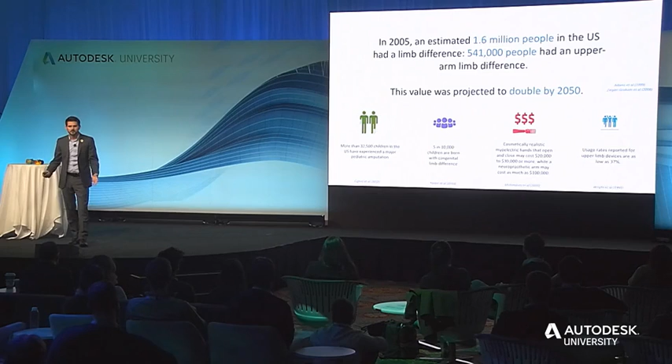Can you think back to the first time you saw a sonogram, or a friend or a loved one saw one? There's a lot of emotion that goes into that moment, right? There's joy, there's some nervousness, there's all that excitement and anticipation for what's going to come next.

But for about 5,000 families a year, what they see on the sonogram looks a little different. Amniotic band syndrome is one of the leading causes of congenital limb differences. For these children, there's a tendril in the womb that will wrap around a growing limb bud and cause a limb, an arm or a leg, to not fully grow.

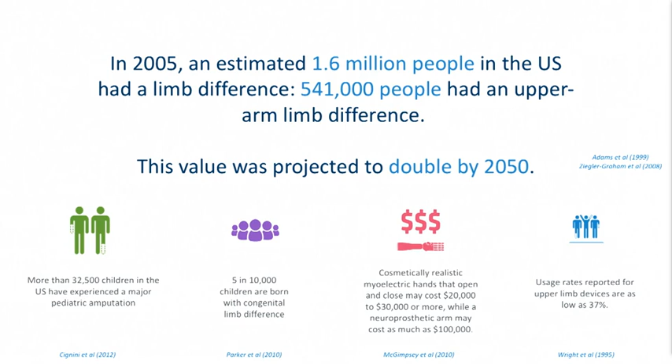When you see that on the sonogram for the first time, it may come as a shock. It's not genetic, it's no one's fault. There's nothing you can really do to prevent it. It just happens. But these children go on to be incredible. They can do everything. But there are certain challenges, and those are engineering challenges we would like to help fix.

The reality for these families is that access to prosthetics for children are quite complicated. The cost of a prosthetic that has full finger dexterity and looks like a human form could be well over $50,000. And children are always growing, and you can imagine having to change out their complex bionic arm as often as you change out their shoes. It would really get expensive, and the insurance companies feel the same way.

What we also find out is that because prosthetics are normally driven for the adult market, they're too heavy, they look like doll plastic, which often makes people feel like they're apologizing to the world for being broken. We saw all these opportunities as a chance to be able to use engineering and creative art to completely change the story for what prosthetics look like.

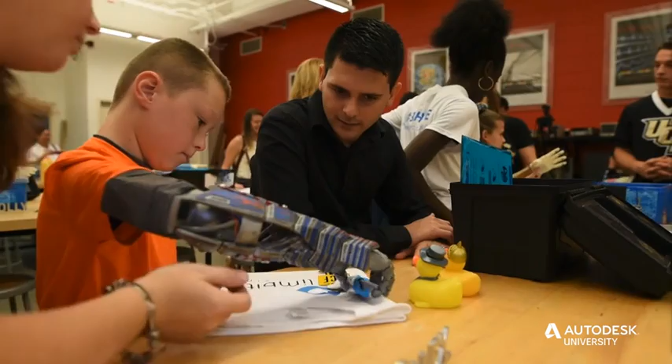This was all inspired by a rubber duck. We wanted to be able to give kids back the opportunity to grasp such an organic, whimsical form. It's so simple, but it's complex in the fact of the mechanics that go to pick it up.

This was one of our very first prosthetics for Alex, and you can see him learning how to use it using an electromyographic actuated system.

We did not have that $50,000 in our budget at my kitchen table. We had our coffee money, which is about $300 at the time, pooled between all of us working on the project. So we came together and we developed this prototype for Alex to be able to fully integrate and use in his daily life. And now at his school on Superhero Day, he dresses up as himself.

But we were at the very beginning, so this was only open and close manual grasp by flexing his bicep muscle on the limb that has a limb reduction.

We really wanted to be better. We wanted to be able to play the piano and to be more expressive and to inspire him to go on, to be able to help others with technology.

We really had to change everything about how we do traditional design. And in order to do that, we found that Fusion and Eagle and Maya were really effective for this. We're creating really organic shapes that are really hard to make in traditional CAD softwares.

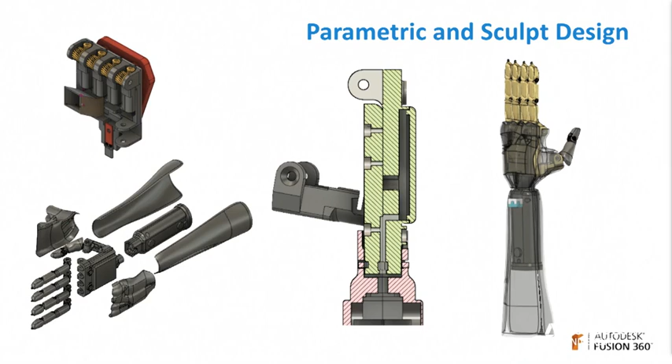But we still need that parametric design for forms that have to be rigid, structurally sound, and have to be able to integrate together with mechanical parts. On the PCB design, it was really complex.

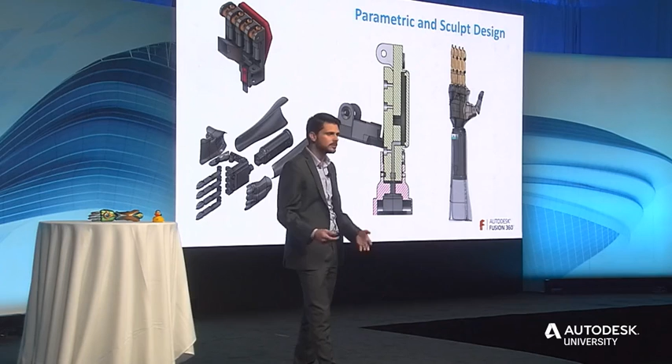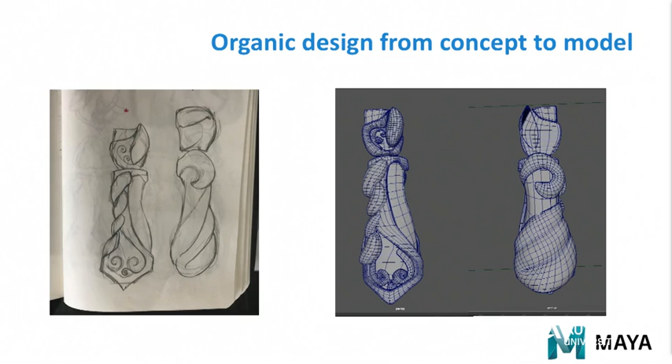The very first model was a bunch of batteries, a bunch of wires, and a breadboard kind of packed all in, much like everyone's first prototypes. And as we started to streamline that, harkening back to that aerospace moment of how do you get all of your avionics into the system, we realized there was an opportunity to split the artistic form from the structural core. We started exploring how to take these concepts from 2D sketches, even on the back of a napkin, and turning them into really complex organic forms in Maya.

To bring it to life, we worked with Stratasys 3D printers to print in ABS plastic at very high tolerances to create these devices. In Florida, where I'm from, if you leave a part in a car that's made out of PLA plastic, it turns to Play-Doh. So that's one of the reasons we've been driven to use ABS plastic.

With our function, we've been striving to give individual finger articulation to maximize function and expression. Above that structural core in silver, we've been able to add interchangeable artistic sleeves that look like kids' favorite superheroes, favorite characters, and anything else they could want.

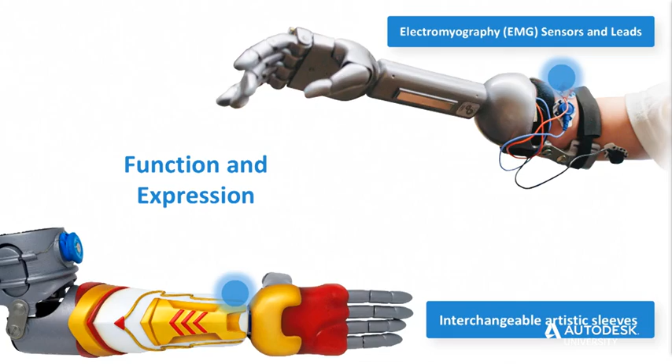For a child, that moment when they get their first arm changes everything. It's very modular. The hand will actually detach and is on a USB-C for power management. The cuff is tailored directly to them, and it even gives them the opportunity to change how tight it is across the course of the day. It even has Bluetooth in the hand, and when you get to see their face light up when they learn how to use it, that totally changes everything from an engineering side.

But in the process, what we learned is that it was so much more than just being able to pick things up. It was about the expression. It was about changing the conversation for these children in everyday activities.

When you're at the grocery store and someone sees you from across the way, that moment for the child could be really, really difficult. They get a lot of weird questions. What's wrong with you? How did it happen? How did you lose your arm? Was it an alligator? And we want to change that entire conversation.

We want it to be a facet of their personality, to be so expressive that now what they often hear is, that's so cool, how do I get one? And to be able to include that expression, we wanted to include the child in the design process. So we went to work building a web portal so that they could be active in the design.

We partnered with some really great companies like the Halo franchise and League of Legends to bring their game characters to life as part of the arms.

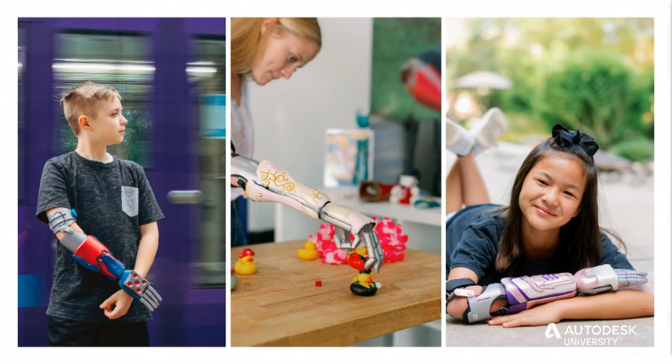This is that impact moment. For us, we were able to give kids back that opportunity to interact with two hands for daily tasks. What we didn't expect is the impact it would have on them socially - that going to the grocery store would now be fun because they were picking up everything with their new bionic arm, and people had to know how they got that arm. It also changed how they viewed themselves, shifting from a defect mindset to one that's an expressive extension of their personality, expanding their reach in daily life.

And of course, there's a lot of rubber ducks in the lab.

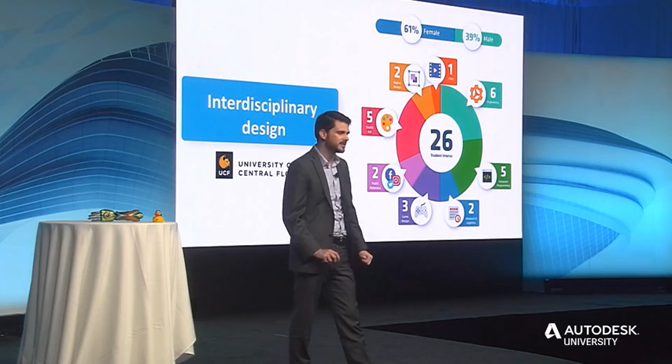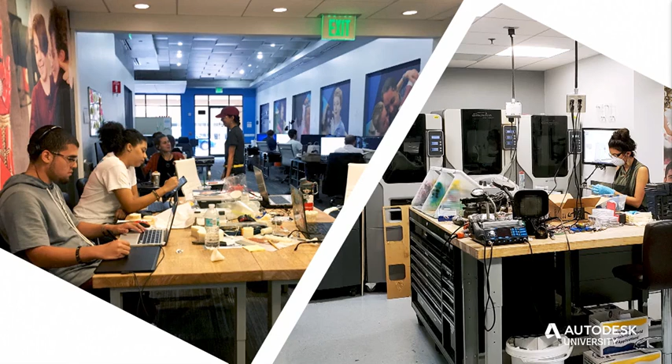In order to do that type of design, we had to branch out much further than our traditional engineering design framework. We now have a team of over 20 undergraduate students on average each semester, coming from engineering, video game design, fine arts, digital arts, creative media, computer science, and everywhere in between. It looks nothing like a traditional robotics laboratory - it's part makerspace, part collaborative zone. Our hope is that the interaction of different majors and specialties will drive the design further.

One of the things we couldn't have done without building that type of mindset was actually creating video games. When you take off the arm, you leave on the electromyographic controller, and you're able to play a video game, and depending on how hard you flex, the character will do different superpowers. This is important because those different superpowers help us teach children how to do different types of grasps and some personalized expressions.

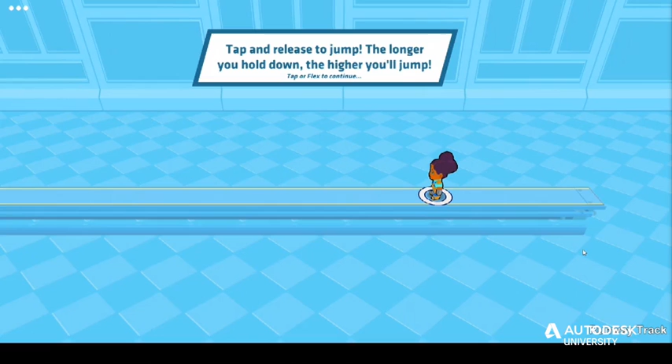And don't worry, there are parental controls as well. This app is actually in the Android App Store right now, and it's able to be unlocked with a Bluetooth controller so kids can play on their parent's smartphone, and their siblings and friends can also play just by tapping the screen. Depending on how hard you're flexing your muscle, the character will jump at different heights. We even have challenge modes that help them learn certain patterns that help them really control that multi-dexterity part of their arm.

In application, it's a lot of fun. This character runs through the Limbitless factory, and you have to keep the mayhem at bay, otherwise the run ends.

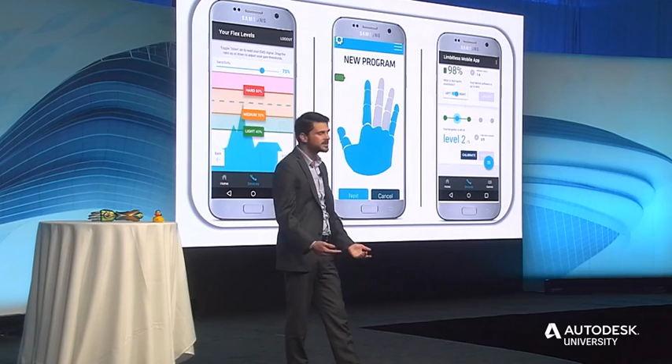We took that app design, and we were able to create a calibration app so that parents could be involved in the process. It allows the family to recalibrate those different gestures, which are based on magnitude or pattern recognition on the arm. And as the children level up in their video games, they actually unlock new functionality on the bionic arm.

For us at Limbitless Solutions, we're still at the very beginning. Each one of these arms costs about $1,000 in hardware, a long way away from what the current market price is. Our hope is that this is the bionic arm for the entire world, and that access to prosthetics will be as easy as access to eyeglasses or braces.

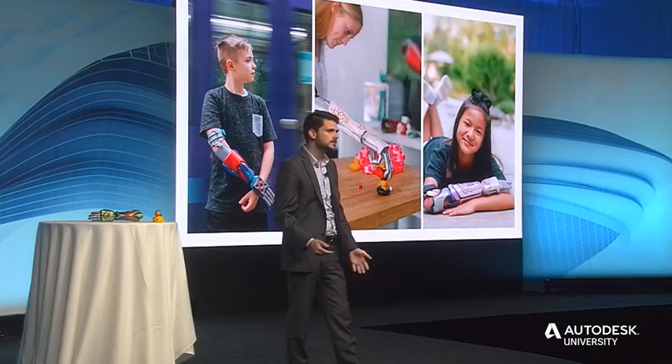We want to make more of these type of smiles so that kids can go throughout their day, not afraid to go to school or afraid to engage socially, but to be really proud of who they are, to change those mindsets and give them the opportunity to excel, whether it's in the classroom or on the soccer field as well.

Our hope is that this authentic use of different software, from Eagle to Fusion and Maya, allows us to bring in different specialties to create a really holistic solution for kids and to really extend their reach on everyday things. Thank you very much.